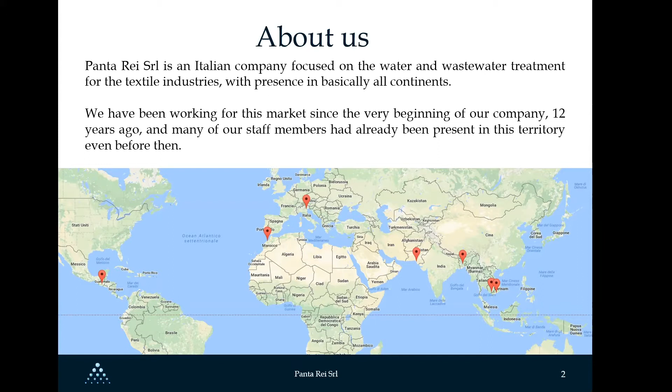We are an Italian company. We're focused on water and wastewater treatment for the textile industries. We are present basically in all continents, and we have been in the market since the very beginning in the textile field. So this is our area of expertise.

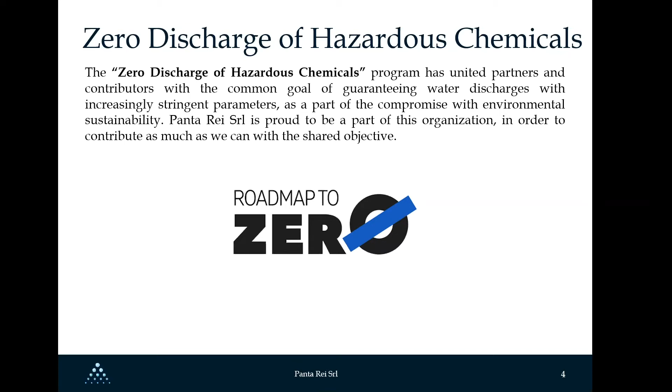We are an ISO certified company, and we're also part of the Zero Discharge of Hazardous Chemicals program, which many of you may know already. We have a common goal of guaranteeing clean discharges, and we have gone through this milestone-wise program, comprised of the foundational, progressive and aspirational guidelines that we have explained also in our past webinars. This is a road that we're walking along with many of the factories and with many of the brands together.

We have more than 90 working effluent treatment plants. More than 65 are located in Southeast Asia, and we have a capillary network of agents, so for any specific request, our agents will be happy to follow it. We have been present in this market for 12 years. Actually, in 4 days we'll be 13 years old. And since the beginning, we have been focused on the textile industry.

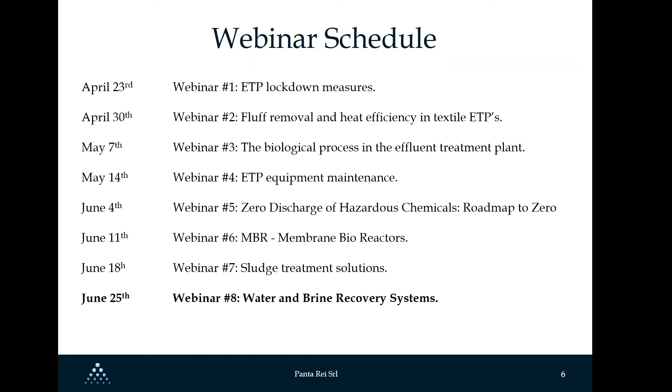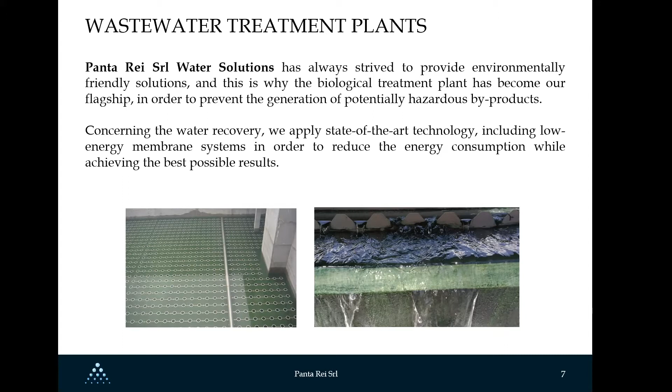So we're going to talk about wastewater treatment plants because we always try to offer environmentally friendly solutions. This is the reason why biological treatment has become basically our flagship, the main component, the main milestone of the wastewater treatment that will allow us to go to water recovery. I would really like to emphasize this because a good water recovery starts with a good pretreatment. In this case, the pretreatment for water recovery is normally a biological section in order to stabilize all the biological matter or the organic matter.

So we think about recovery in a very global manner, in a cradle-to-grave approach. That means looking at anything that comes in in order to see what comes out. So we think about the output reflecting on the input. This is why when we talk about a water recycling process, we also think about what's the best approach to get to this goal.

In this case, we can talk about effluent separation, effluent differentiation. Why? Because in many cases we have the dye bath, and we have the washings, the rinses, and they have different characteristics. So whenever it's possible, we recommend separating these effluents, because the dye bath may contain up to 70% of the color and salts used in the whole process. So it's a very concentrated effluent.

So if we can tackle this at the beginning, we can also improve the quality of the water recovery and reduce the costs. Of course, we're well aware that it's not always possible to do this. We know that in some factories it's not possible to separate the effluents anymore, or maybe it's not possible to have sodium chloride as salt. But don't worry, because we have alternative solutions for everyone.

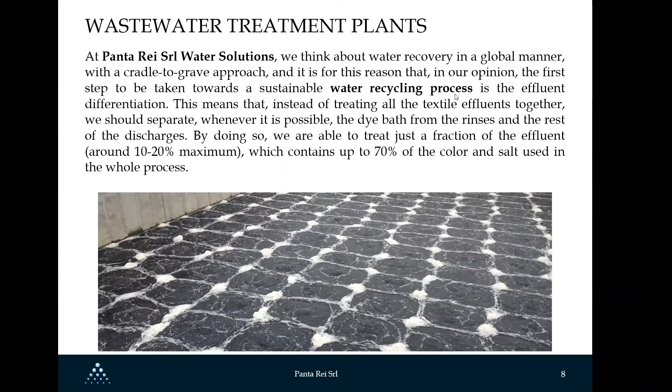So talking about the brine recovery, the brine recovery system is focused on the dye bath, especially dye baths which are mostly made up of sodium chloride salt. With this treatment, we're able to give a solution with an economic advantage, which recovers this effluent in terms of a clear brine containing nothing but salt and water. We can recover up to 70% of the dye bath contents, meaning up to 75% of the salt you are buying for your dyeing process can be recovered back into the process already in liquid form.

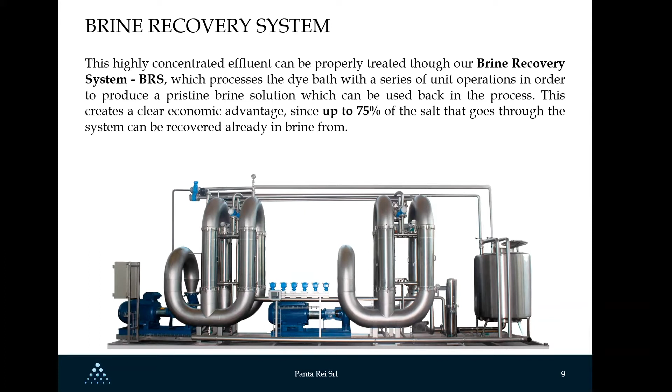As you may already know, the dye bath has a high pH, a high temperature, and a high salt concentration. So it cannot be treated with any other kind of system, because if we use a biological system, basically all the microorganisms will be killed, since we can achieve pH values of up to 13 and temperatures of up to 70 or even 80 degrees Celsius in some cases. That would kill any bacteria and microorganisms present.

Plus, we have a significant amount of suspended solids as well. So what do we do? First, a fine screening step, and then we remove the fluff, the excessive suspended solids, with a microfiltration system. Then we have the membrane treatment, which is the core of the treatment. The first step is an ultrafiltration in order to remove all suspended solids.

Since we're talking about a very concentrated, very hot effluent with very high pH, we use ultrafiltration, but it's not a common ultrafiltration made out of polymeric material. It's a ceramic ultrafiltration, which can withstand any high temperature or high pH values without any problem. Once we've treated the effluent with this ultrafiltration system, we can move to the next step to really think about color removal and recovery of the brine.

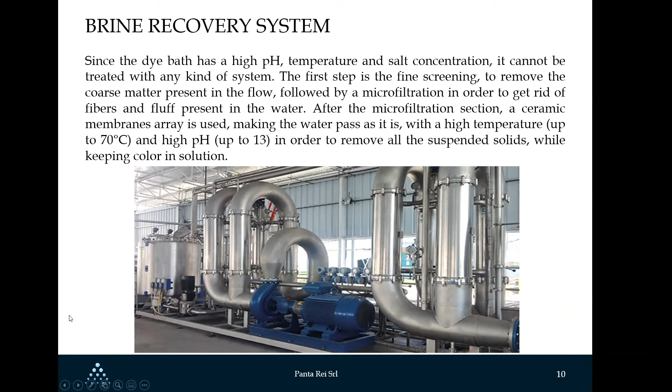So we have to neutralize and cool down the solution, because in order to remove the color, we're going to apply a nanofiltration system. To use this kind of membrane, we need to neutralize the effluent to make it pH neutral, and we have to cool it down, because the maximum operating temperature for nanofiltration membranes is around 40 degrees. So we'll cool it down to around 35 degrees Celsius and then go into the nanofiltration step. This step will completely remove the color, and then we'll have a clear brine which can be reused back into the process.

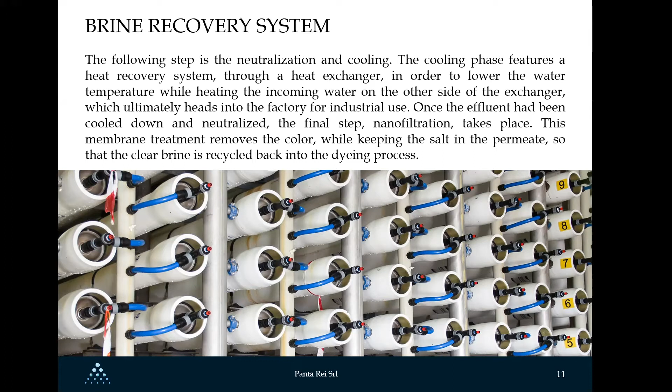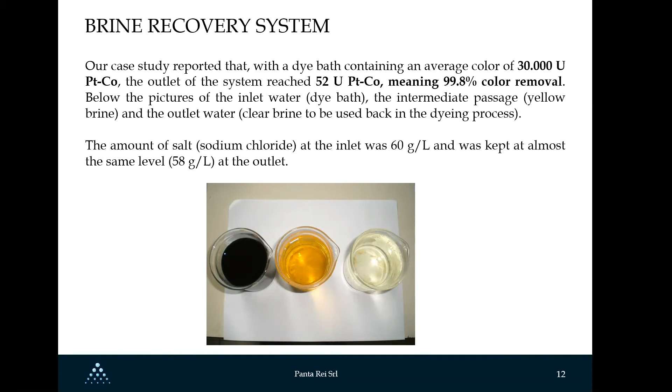So this is about brine recovery, but now we will talk about the water recovery. One thing we would like to stress is that we can do both, or we can do one of those according to your needs. So in this case, if we have separated the flows, we will have the dye bath and the rest will be the rinses, and those would go to the water recovery system.

When we put the brine recovery system before, that means you have the chance to lower the operating costs of the reverse osmosis, because if you decrease the TDS, if you decrease the salt going into the reverse osmosis, you decrease also the osmotic pressure. That means less energy, so less cost in order to pump that water through the RO.

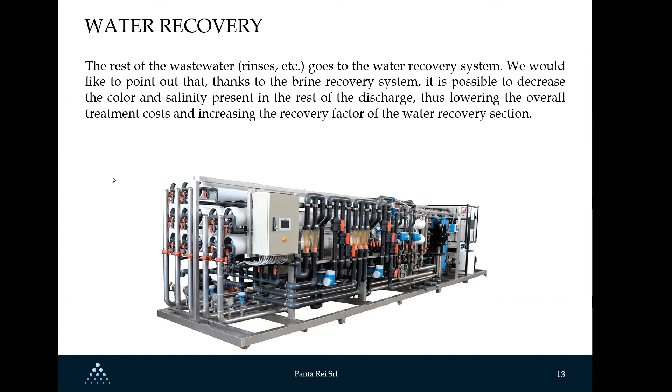One thing we also want to stress is that we do not consider zero discharge to be the only approach for water recovery. We are well aware that it requires a significant amount of energy, and we know that saline byproduct is generated, which may need to be evaporated, for example, or subject to further treatments in order to properly take care of it.

But we can offer alternative solutions. For example, we can treat only maybe 20 to 40% of the water coming out of the biological treatment. That means you treat a part of the water and the rejection is still able to meet the discharge parameters. So even the RO concentrate, when mixed with the other outlet of the biological process, can still meet the discharge limits, and you would be able to recover 20 to 40% of the water to use back into your process. We can certainly propose a zero discharge solution as well.

Normally this is an approach we use especially when the water cost is high, or in some places where it's required by law. For example, we have had experiences in India in the past, where in some Indian states it was mandated that no water could come out of the factory. So in those cases there was no choice, basically. Or also in some other regions where there was almost no fresh water available, so we must recover the water completely in that case. In other cases, we can adjust according to the situation that each customer is in.

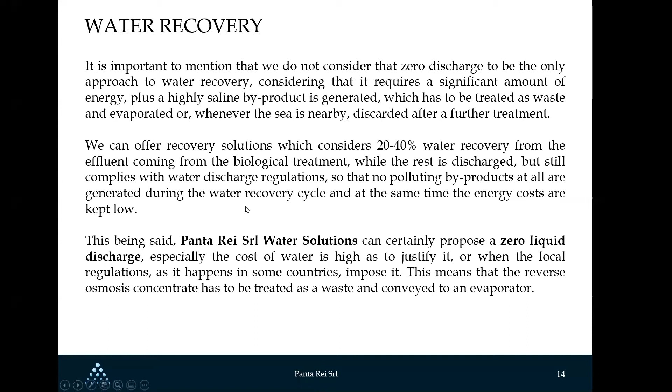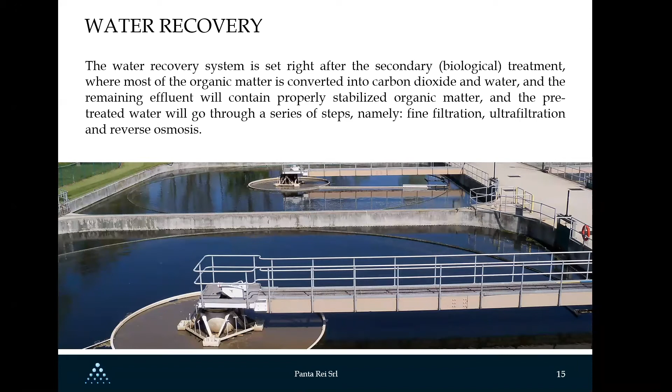So for the water recovery, we will be talking about getting the water that comes out of the secondary treatment, in this case a biological treatment. After we have properly stabilized all the organic matter, meaning we've reduced the BOD and COD to an acceptable level for the membrane treatment, then we can go into this water recovery. Normally this water recovery is made out of fine filtration, ultrafiltration, and reverse osmosis stages.

So the first step for the water recovery will be the fine filtration. Normally you can do that with a sand filter, but we have alternative solutions which are more, let's say, plug-and-play, allowing you to operate 24/7 without stopping. Why? Because we propose filters which continuously work and backwash without stopping the machine, so you do not need large storage tanks to feed the filtration unit, and you guarantee a continuous water delivery into the ultrafiltration system, which is the next step.

Here we're talking about stainless steel filters with a 20 micron filtration grade. So it's a very fine filtration that can be achieved in a very compact unit and with a very limited space requirement.

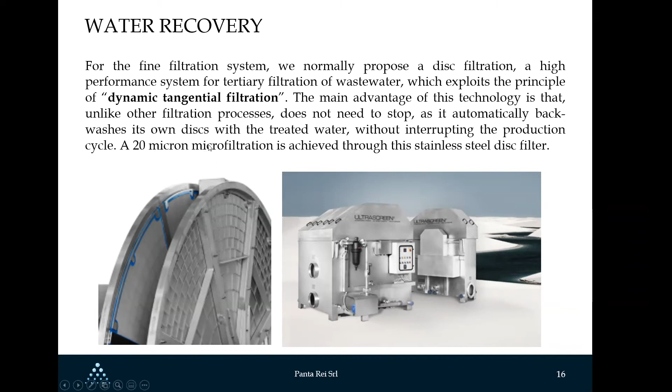After the fine filtration, we have the ultrafiltration system. This means we filter the water so that the suspended solids are blocked and do not go into the reverse osmosis. This is a pretreatment that improves the performance and lifespan of the reverse osmosis membranes because it acts as a shield to the system. This ultrafiltration system has a filtration range from 0.1 to 0.01 microns, and it's suitable for basically any kind of application after a biological treatment.

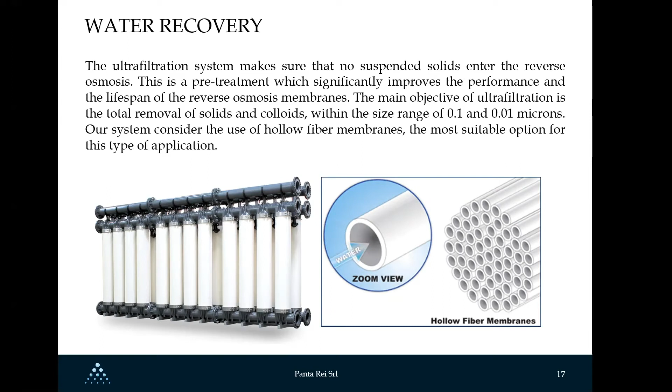And finally, after the ultrafiltration, we have the reverse osmosis, which is the ultimate filtration treatment. As you know, it's the only one able to separate the dissolved salts from the rest of the water, and it can give you an effluent with even less than 150 milligrams per liter of salt.

So, without requiring further treatment, this water coming out of the reverse osmosis can be used back into the system, into the production, because we can use it wherever we need an application of high quality water. That means water without hardness, without high TDS, without color, and of course without any organic matter residuals.

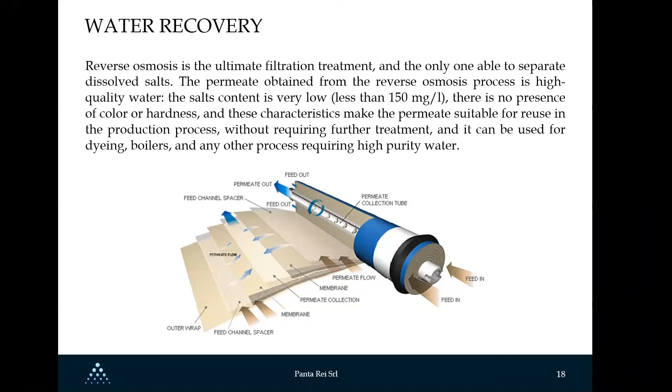We have also developed pilot plants for water recovery. They can be installed at existing facilities, always after a biological treatment, and this allows us to achieve results that are completely satisfactory in order to reuse the water. Now we will use the results of a case study regarding the quality of the recovered water.

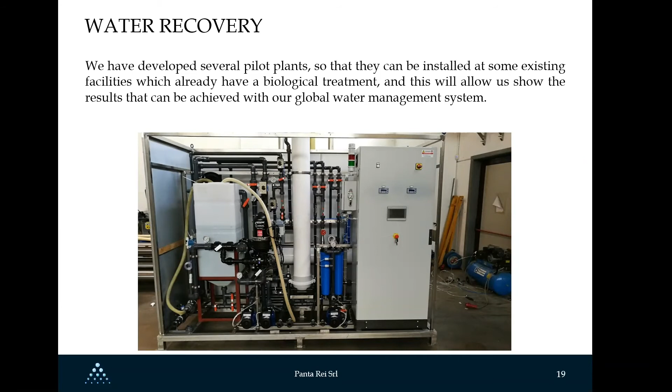Here you can see, for example, the inlet BOD after biological treatment was 22, and it was reduced to less than 3. COD was 125, and the final result was less than 5 milligrams per liter.

The inlet TDS value was 3,500 milligrams per liter, and at the outlet we got just 47 milligrams per liter of TDS. As you can see, this is even better than the groundwater used at the inlet by this specific company. The hardness was 9 milligrams per liter, and at the end it was just 0.02.

Chlorides went down from 940 to 8, and sulfates went down from 1,280 to 5. The color value, another very important thing, was less than 5 units of platinum cobalt—basically colorless water.

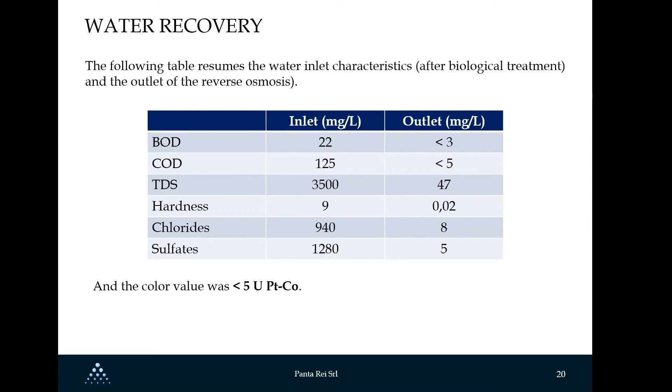Why wasn't the decolorant used? Well, because if you use a water recovery system, you do not need to use the decolorant here, since it will be removed by the reverse osmosis.